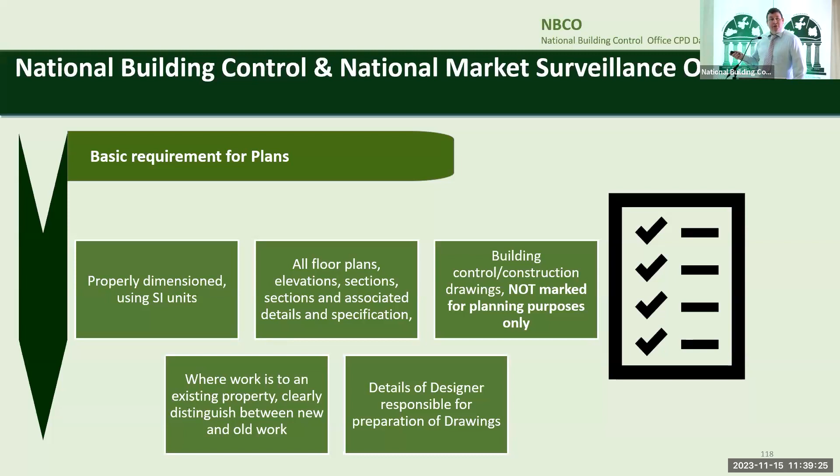So this is the floor plan here, and the basic requirements are still the same no matter whether it's a circular house, round house, rectangular, hexagon, even the bathroom, the toilet. If you want to put in a round toilet area, you still have to comply with the requirements of the technical guidance document. So the 750 by 1200 area, the height 2.1, the door and the corridor around that. And that's the requirements. Building regulations don't need to look at the design of the building from that point of view. They're looking from a point of view of compliance with the building regulations.

And these are some of the sample things that you can show on the floor plans: the fire stopping, cavity barriers, fire alarms, bedroom windows or doors, etc. Vertical circulation. So if there's a 3-story house, you may outline the fire resistant walls in red, for example. The location of the radon sump and the outlet. And then make sure when you're doing the elevations that it's not coming up and having to go around windows if there was a soil or passive stack to be put on at a later stage. Part M as well, the width of the corridors, stuff like that.

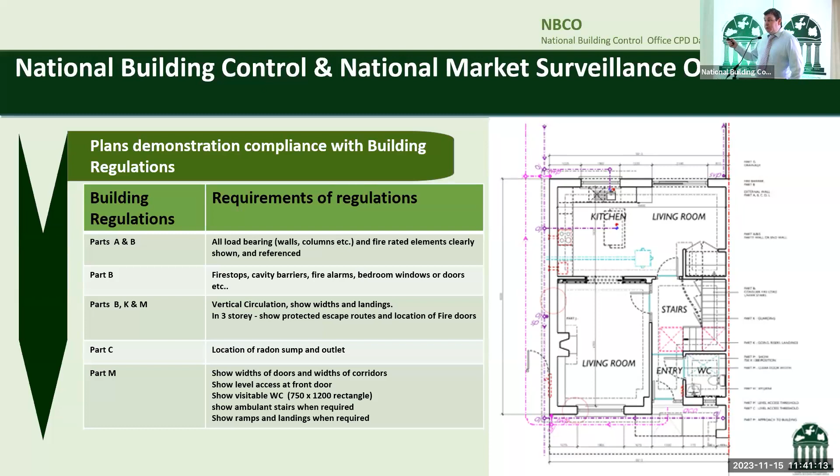It's not that onerous. It doesn't take that much time to do it, but it's your design. And the builder's building to your design. So if you have it correct, then you can say to the builder, you didn't follow my plan. Other things that can be on the drawings as well: the landings, the guardings, the bedrooms when you have them labeled. Even writing bedroom on it is very good, because building control officers can say, well, there's no window provided in that room. How are you going to provide means of escape?

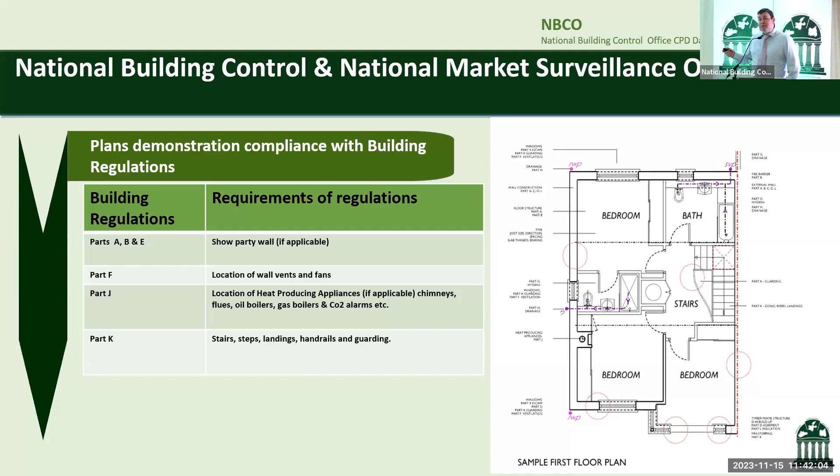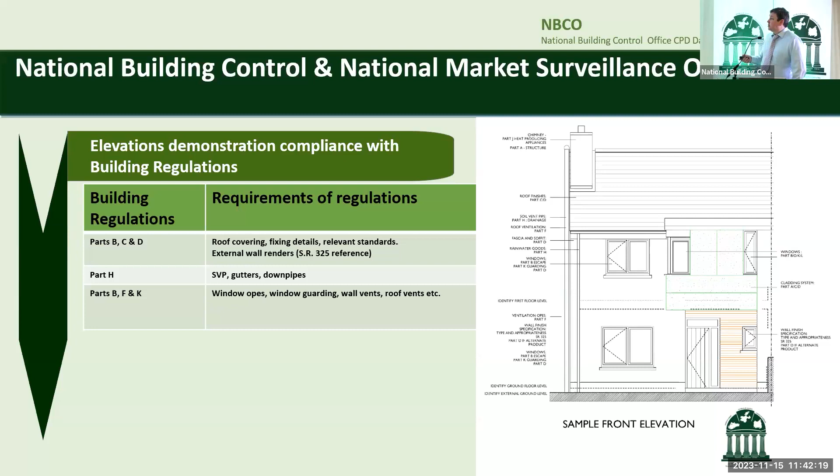So your finishes, how it complies with SR 325 if you're using a block and rendering, expansion joints, stuff like that. So it's not an exhaustive list, and you can develop it as a checklist as an assigned certifier or designer to take it further, to make sure that you have as much information on it, like the part C, the location of the radon sump and the outlet on the ground, the DPM or radon barrier, the SR21 material, the build ups, and that is specified.

The ACDs junctions, have we numbered them? How are we in compliance with the ACDs? Do we need to get some of them thermal modeled? The U values of the walls, ceilings, roofs, etc. The windows, the roof covering. What are we putting on the roof? Is it a party wall then? Issue. Do I have to look for B9 compliance if it's a dwelling house for surface spread of flame?

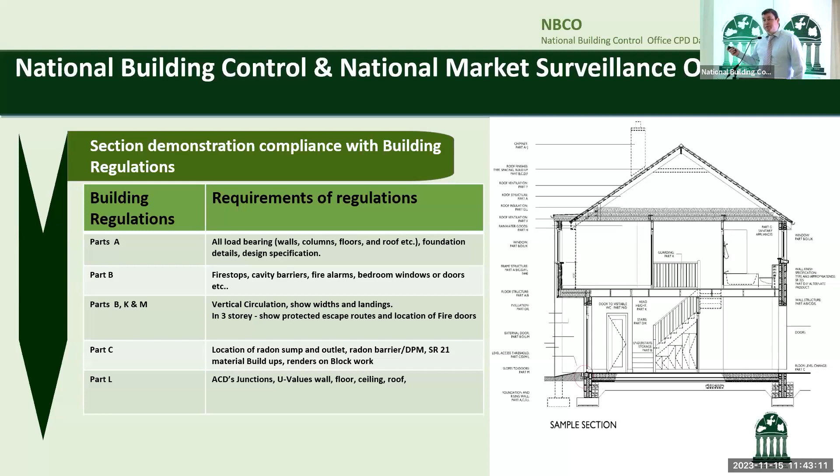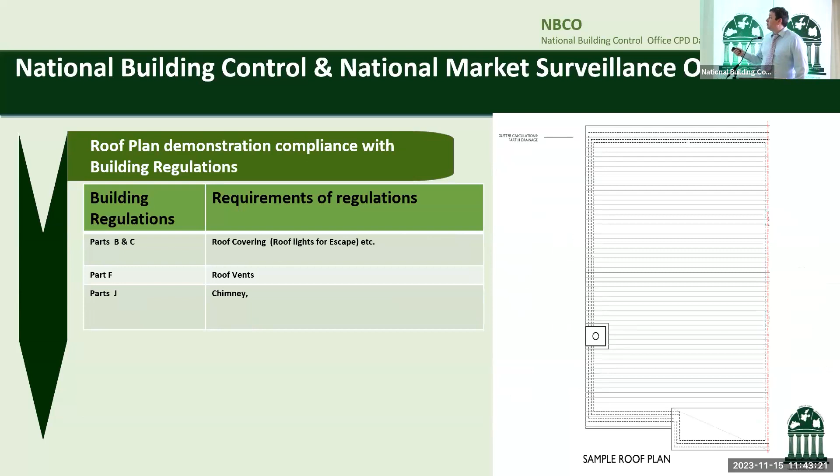Are there roof vents in it? Is there a chimney? Do I have to consider the flashing details around the chimney, stuff like that? Cross-referencing with the details, have I identified all my key junctions on my ACDs and the plans and elevations? The details, construction details, design calculations. This is an ACD that's on the thing, and it's just developed out so that you can include the part A, the part C, the part D, part M in it, and develop it more as a designer. And if you're doing 50 of these houses, it would pay you to do it.

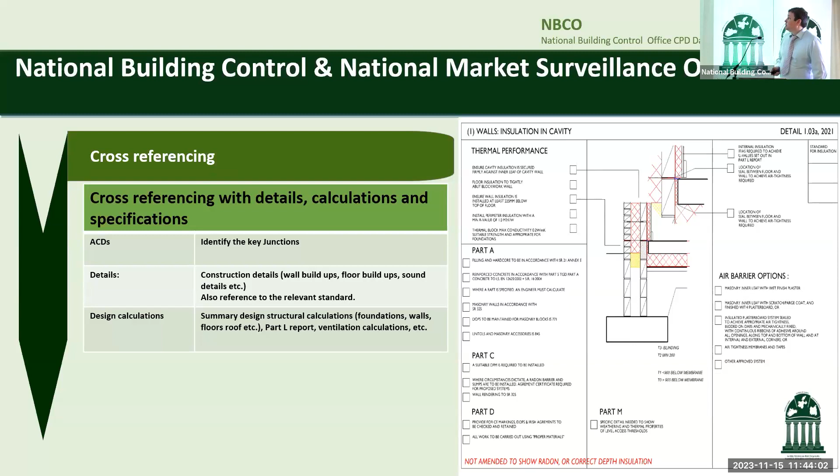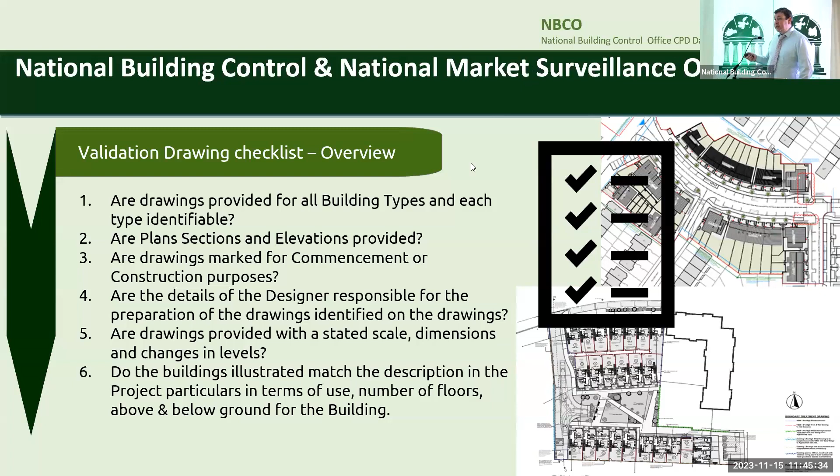So reasons for revised information, like validation, and it's a €30 fee, and if you're not putting it in right, you're costing the state money and time that a building control officer can actually go out on site to inspect, instead of telling you that your application is not in accordance with Article 9 and you need to submit revised information. Drawings not labelled construction drawings. The drawings do not demonstrate compliance with the second schedule of building regulations, A-M.

Disclaimers on the drawings. Oh, I'm not responsible for building regulations. The builder is. You're the designer. You prepared the drawings. And then you want to pass the responsibility on to someone else. Drawings do not show the responsibility. So these are examples of disclaimers and stuff that we've seen on drawings. And these all go back, and the architect or the engineer or the building surveyor or the other design professionals that submit notices have to spend hours taking this information off and uploading the drawings, and then it goes back to the building control officer to revalidate.

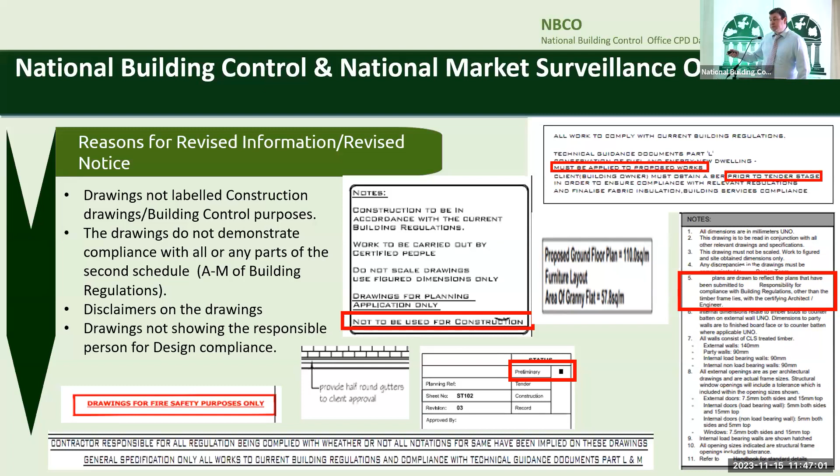So drawings do not demonstrate compliance with the building regulations or are insufficient to support the document provided. No information about the structure or fabric demonstrating how the building is to be constructed. You get a blank drawing like this. Huh? No notes, no specifications.

No design, really, if you want to put it like that, because it's a plan. Building extensions don't show the whole of the building, so they only put in the wee extension. They don't put in the rest of the building. So there may be other issues on the site layout and boundary issues and adjoining buildings that may be considered as part of the building regulations, you know?

The builder gets that in the morning and goes out to build that. He's the designer. So he needs to go back to the architect and say, hold on a minute, I'm not the designer. You need to provide information like that so I can build this drawing. Building control need to say, no, that's not a building control drawing. Check the schedule of documents when you see this. The building is not designed. It doesn't show compliance with the building regulations.

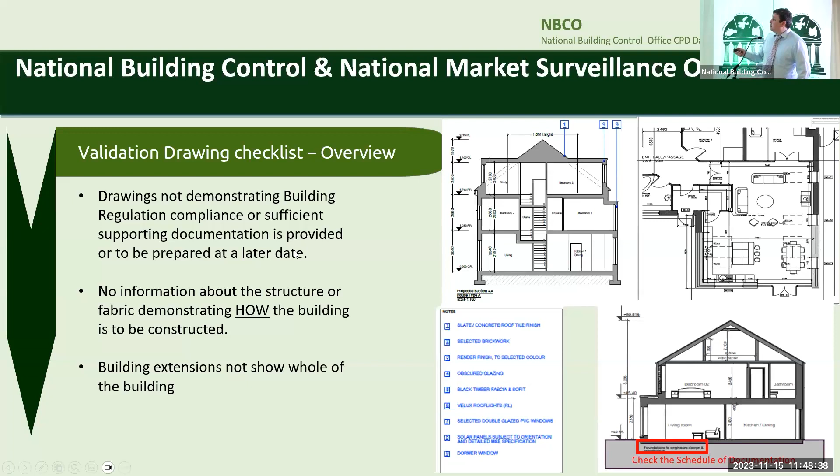So outline the site maps in red. Existing buildings show existing and proposed works, show floor areas of proposed works in existing areas. And these are a good example, showing the new works, whether it's change of use, the areas. And that's good to give to a building control officer. He can go out to site and he knows what he's actually going out to inspect.

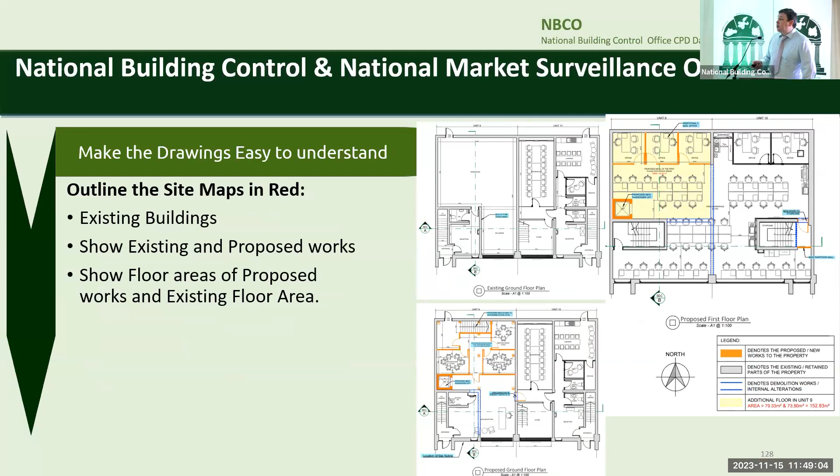Drawings not required. We get a lot of drawings put in that's not required. It's like, we just put it up because it's there, we have it. Demolition drawings. Demolition doesn't fall in on building control because Part M doesn't apply to it. Landscape drawings. Unless the landscape drawing is in the house and creating a fire hazard, it's not a building regulation. Site drainage works, so that's the main foul and surface water drain. You're just showing that it's connected to it. They don't need to be uploaded. Sewer details, manhole details for the main thing. And these are actually in the BCMS that people have actually gone and uploaded.

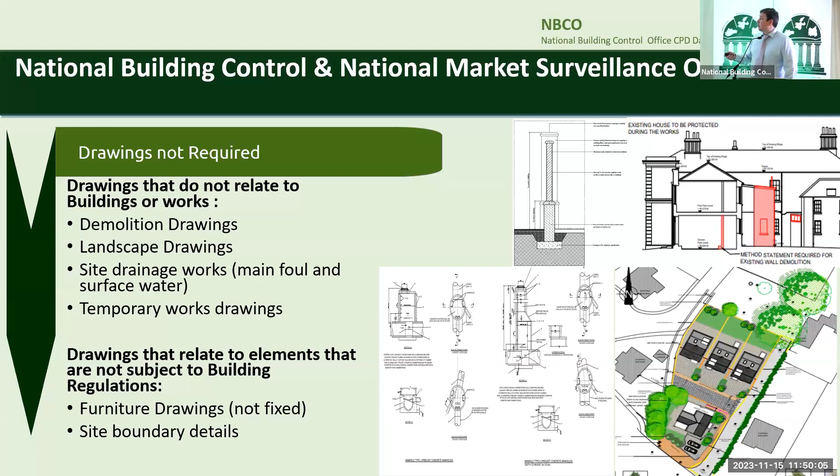Furniture drawings that are not fixed in the building are not required. Site boundary details, not part of building control. They're planning. So the schedule of drawings to be submitted and as built, and these notes there are not submitted with the CN, not requested by the Building Control Authority, and won't be submitted on updates. So check that you're getting a proper list on the updates. As the designers, the more design information you have, the better the construction.

Remember, the responsibility of complying with the law rests with the owners, designers, assigned certifiers and builders, and validation is a statutory process for the local authorities' notice applications, and validation is solely based on the assumption that the facts stated in the form, notice, application, certificates, or declaration and attached statutory documents are true. So it's like, I forgot to send in the notice, or I'll send it in tomorrow. We've already started works. The building control officer probably won't call. But if the building control officer calls out, that notice will be invalidated. And you may have to undo all the works that you've already done. And you carry the cost. And then there's a blame game on site.

So prosecution and enforcement carry costs, and building control authorities are not planning, roads, water, or waste authorities. We only deal with building control. A valid commencement notice in itself doesn't mean that you have legal entitlement to commence work on the building. You may have other requirements. You may not have planning, because you can get a commencement notice without planning. And the onus is on the owner, builder, designer and assigned certifier to comply with the law.